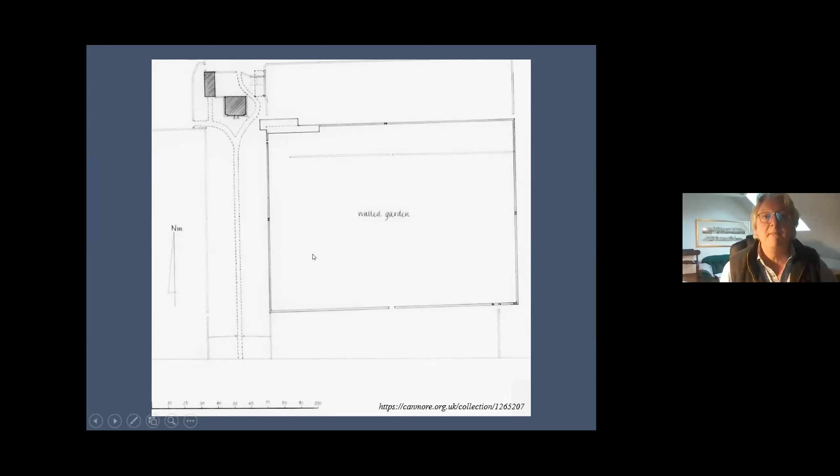This is a close-up, zooming in, showing the extent of the walled garden. It's absolutely huge and very, very well built. It's basically sort of 2.5 to 3 meters high. These walls are coped with great slabs and containing some internal features.

So this seems to be a sort of a terrace of some sort, and you wonder what was being protected within here. Is it trees particularly, as well as the garden areas? And you can see it's slightly down slope, so it's just tucked in behind the ridge. So that's a maximum area of protection. This falls outwith the current project, but it's all part of the associated landscape.

But you can imagine this symmetrical composition with this great frontage to welcome you with the sweeping staircase up to the front entrance.

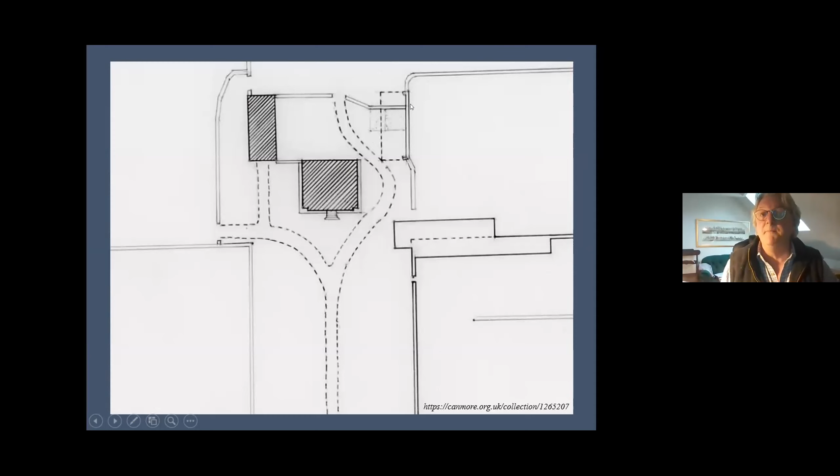And clearly it's not just a farm shed in its original form. It may have been a dairy or ancillary storage or accommodation. So not just a farm building. So my colleague John Saunders has been very busy trying to visualize how this great landscape may have looked in its heyday, or as intended. That was the building we were just looking at.

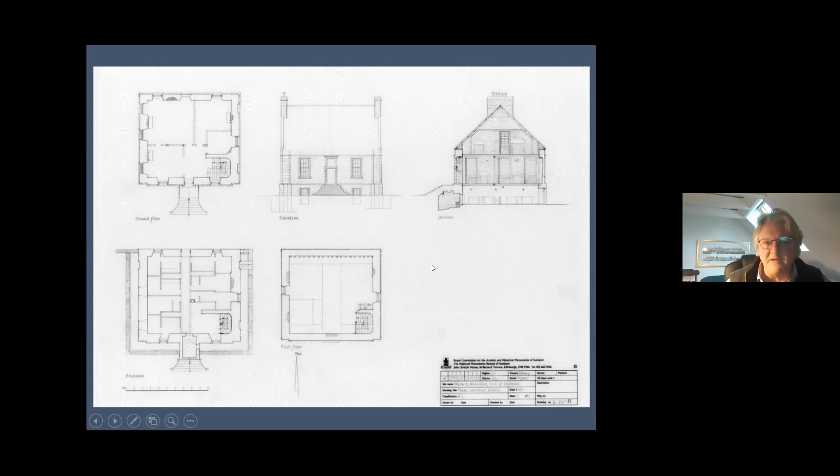And you can also see the front staircase here, in a good state of repair. These are great stone balusters, and we'll come back to those balustrades. So in terms of formal study, the building has been sleeping for a long time, and it wasn't until the late 1990s, as far as I'm aware, that the first formal survey was done. This is by the Royal Commission, a typically beautiful bit of recording work, and they've done a whole suite: the three principal plans, a principal elevation, and a very helpful cross-section through the building. An absolutely wonderful bit of individual recording.

It certainly looks a bit odd. I mean, it's stumpy, and there has long been speculation that it may have lost a more developed frontage, possibly a great pediment sitting on top, rising from these little setbacks here. And I'll get into that a little bit more in a moment or two. But again, you can just see these lovely margins, absolutely designed to catch the light and to make the building appear more stately than its scale would necessarily lead you to imagine.

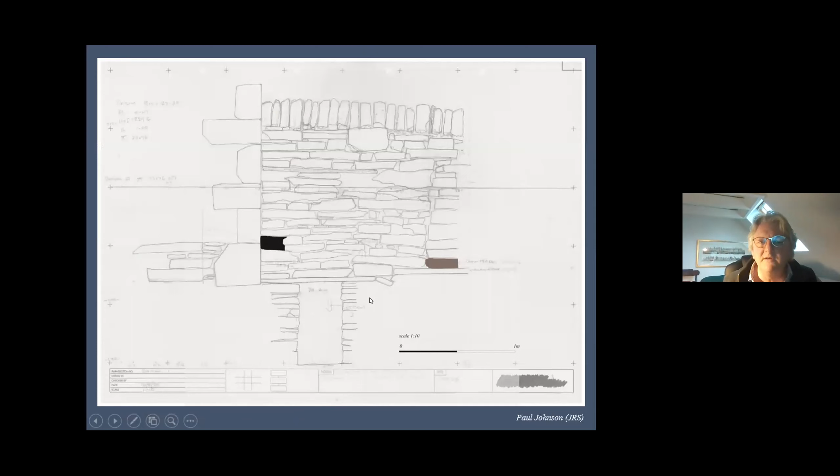And so one of the focuses is how did this moat, this sunken area, work, and where did that particular entrance lead to? And so this has led to some of the initial recording exercises. So a very lovely drawing here by Paul and his team, showing this area here, showing the entrance to the drain, but they then discovered the top of it. So that's just on the other side of that wall.

Quite a lot of interesting finds have been made, ceramics and glass, animal bones and so on, as this work has progressed. And so all of that is being carefully sorted and curated, led by Gail Drinkall, who is the archaeology curator at Orkney Museums. So quite a collection is building up, relating to the domestic life, particularly of the house in its earlier period, both the Honeyman period and the Rae family and later.

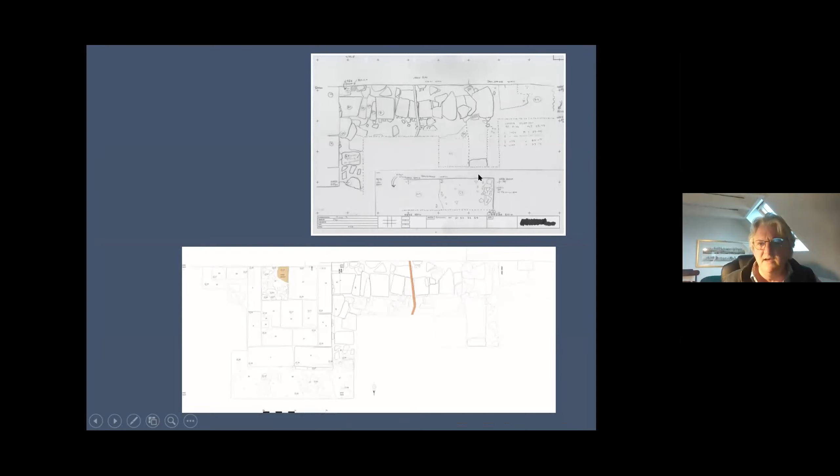And then these are some of the records, the field drawings of that, sorry it's a bit faint, but in the process of being digitized to turn into a full and formal record of the excavation.

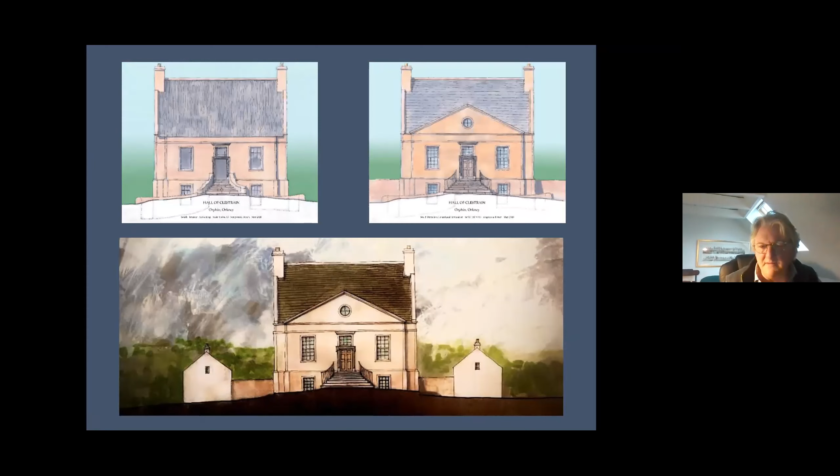And so you have a very smart classical architecture that has been imported at no small expense to the Orkneys, and an extraordinary sight it must have been when first built. And again, I think this is current thinking with the wings.

So there has been a fair bit of historical research. Fiona Gould, who's one of the John Rae Society trustees, has been working with a local group and ploughing through and collating and gathering documents, also working with Orkney archives.

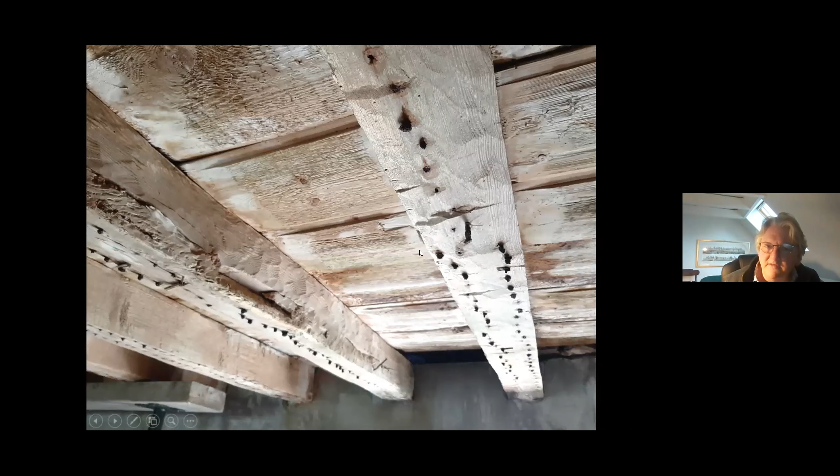So when a lot of this cement comes out, when these are removed, when the floor is taken up, we are very hopeful that there'll be some fantastic evidence for what appears in that inventory, and we can match up the individual areas. What we can see of the ceiling, for example, some details are absolutely wonderful. These are the carpentry details of sawn and adze, the lath nails to the plaster ceiling, evidence for partitions, sockets and joints and so on.

So clearly there's a lot that can be learned about this space. And so even if it's not restored or reinstated, it will be absolutely fascinating to know what the arrangement had been. So I suspect there'll be a lot of evidence to be revealed, but not at this stage.

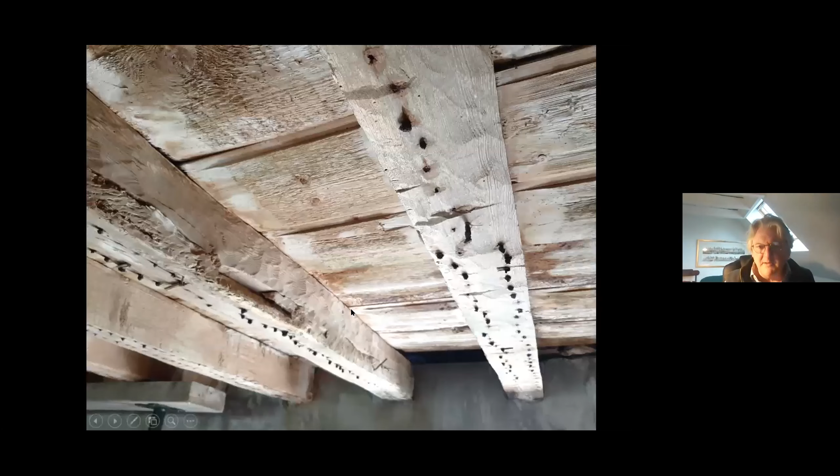In one corner of the basement, you have the stair, very finely built stair that rises up to, well, or descends from the principal level down to the service areas where the kitchens and all the other service arrangements were. This is an extremely fine pen check, basically cantilevered.

Each one supports the next one, and they're sort of socketed into the wall. And so it's a self-supporting stair built on sort of mathematical principles, and it's a very, very fine feature, very sort of Edinburgh New Town, or wonderfully sort of Georgian. That comes up to the principal level.

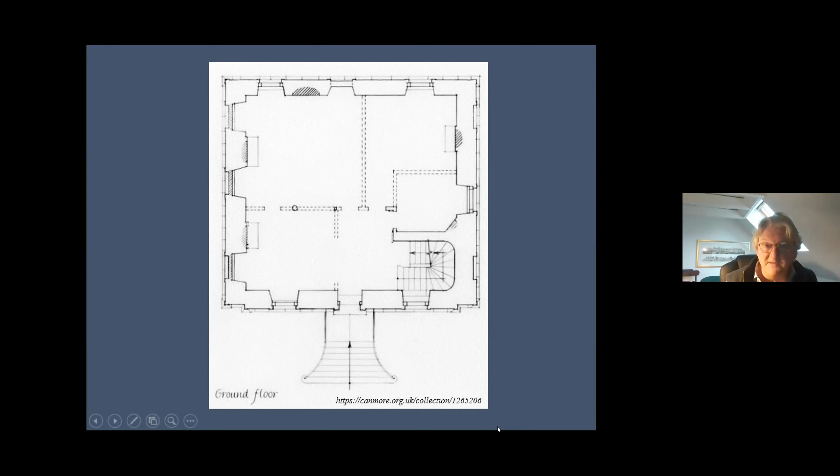And so in terms of the plan, a lot of the evidence was clear, and certainly the inventory allows naming of a lot of these spaces. So here we are. This is the main entrance. You just come in. This is the stair going up to the first, second floor. Absolutely beautiful again, and it's a much taller space, and so the steps are taller, and you can see the sort of state of it.

Most of the walls are green from decades and decades of saturation and salt ingress and the Orkney climate. So in some ways it's amazing the building is still standing, but the building is absolutely saturated. A lot of the timber, particularly where they meet the walls, have rotted, and so there are stability issues.

But again, once you start looking, you can see all sorts of things like internal wall plaster. Here's a lovely fireplace with a beautiful sort of basket arch detail visible, later packed in with cement. There's another fireplace. So these are all lovely features, and you can imagine a sort of timber panelled surround framing the stone.

And as you look through, there are all sorts of strange details. These are lintels, some of the windows may have these marks on. These are cut by a little blade called a race knife. And these are almost certainly merchants' marks from the importation of this timber, which is conifer, and likely comes from

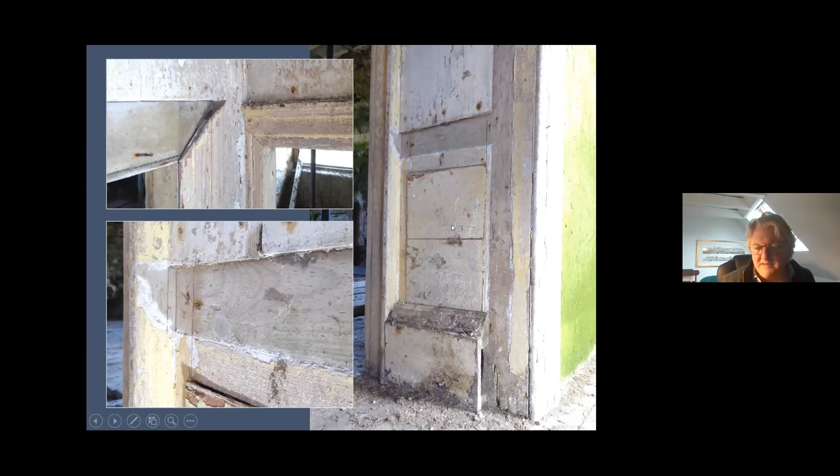Still dado rail detail, and again you can see where it's been pulled off. You've got the profile of the moulding, and so that's enough evidence to actually reinstate that timber. So it's just here. Skirting, one bit of skirting still survives with a moulded top, and beautiful rich mid-18th century detailing, and even the yellow paintwork still survives, and it looks like it has never been overpainted, which is remarkable. I think that's an 18th century paint scheme, confirmed by some evidence elsewhere.

So this is looking up at the soffit board of the window, and again beautiful fielded panels and the very fresh yellow paintwork for that particular room. There are bits and pieces lying around, and we're looking at all sorts of evidence, and every individual timber can be precious.

Here we have one which has a wonderful, very, very crisp profile. This is above, we've relocated it to that position there. So this is actually within a little vestibule. So that's the hall. You came into a vestibule to then go into the next rooms. And this is a cornice, a timber cornice that came from that position there. It's the only surviving one, but it's enough to say, right, okay, you can reinstate that detail in that room very, very reliably.

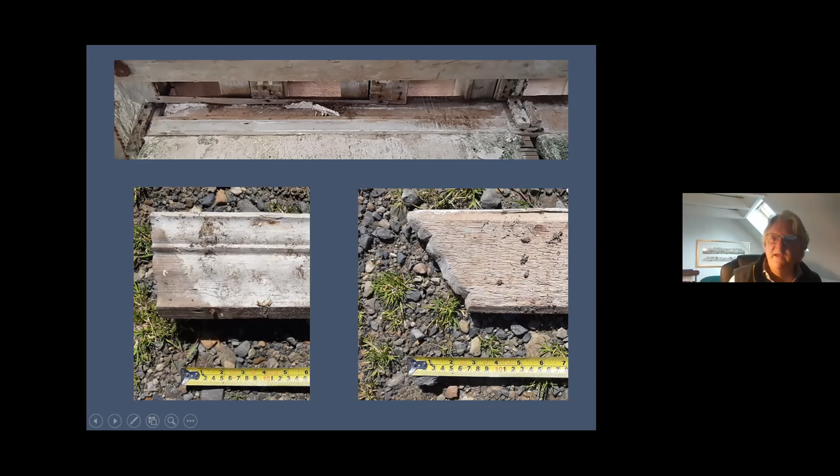Here's a close-up of that, so you can see the profile of the returning part of the cornice. And these incredible Georgian, this has been contoured to fit as the next timber would fit onto here. It just shows the absolute quality of the joinery. It's all imported pine.

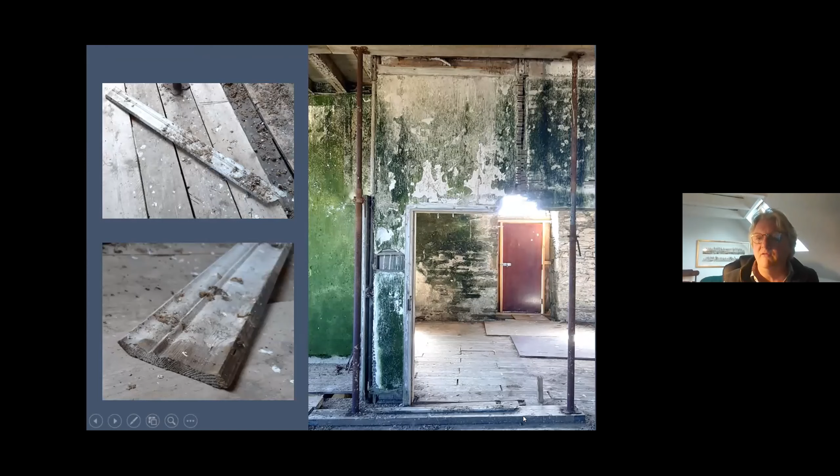Where a lot of these features have been taken out, because the original floors are still in position, you can actually see a great deal of evidence on the floors. And so here you can see sockets, mortises cut in for partitions that have since gone. So this is the vestibule that we were just looking at. So those walls survive. We're looking at the evidence for this wall here in the floor at that point, looking the other direction. And so there's a floor, and you can see here an entrance. These are studs going all the way along, and I think there's another entrance on that side.

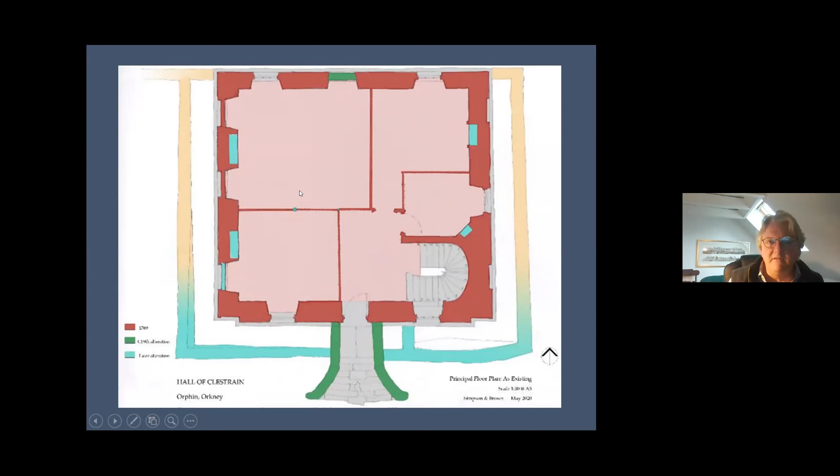This evidence is again subtle, but it's absolutely wonderful, and a lot of pigeon guano had to be cleaned off to find all these things. So this will need to be recorded in great detail, and it will provide a complete plan of the first floor level, confirming. A lot of the evidence has gone in here, but we know additional details, such as there was a closed vestibule with an entrance at that point, and I think there was probably a door in here. But just the survival of what still remains and the evidence for what doesn't is extraordinary. Again, we know that there were entrances here and here.

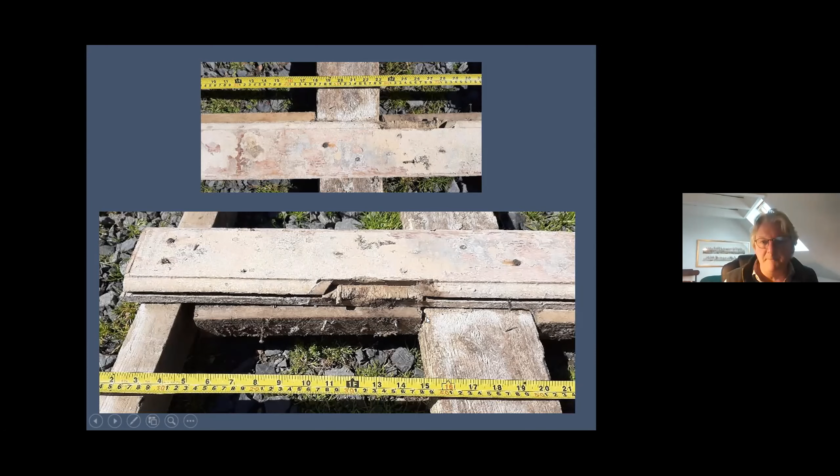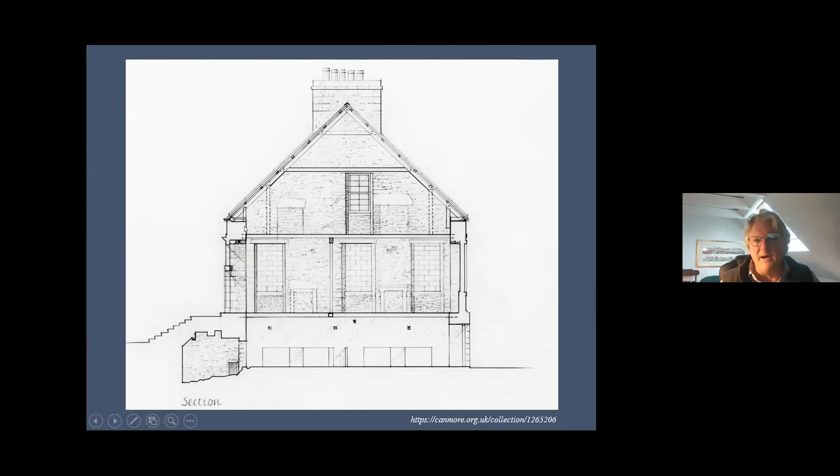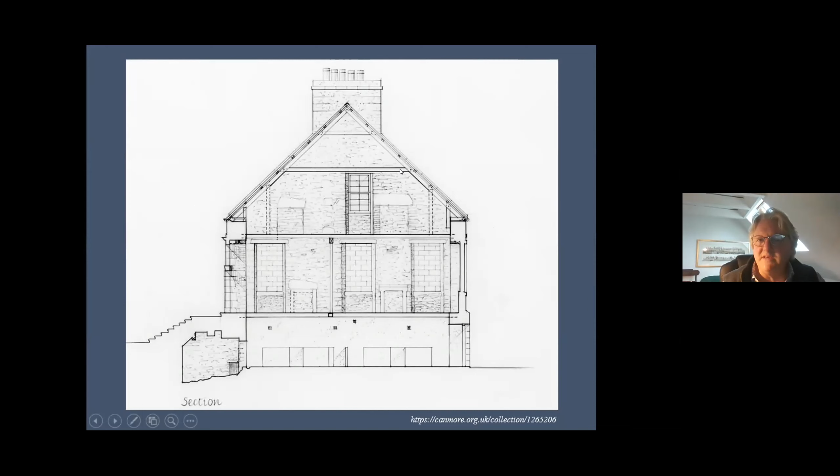So I'm coming back to this cross section. We're just going up to the bedroom level here, and showing you the roof cross section. It's a very broad span, something like 8 or 9 meters. So it's a very, very broad roof, but with single rafters held in place by these collar beams. And it's an absolute spectacle to behold. It's absolutely superb. Superb bit of carpentry construction. It's an incredibly exciting roof structure to see as an archaeologist.

You can see, well, it's a pine roof, and there are all sorts of joinery details. And this particular framing at the wallhead smacks of something earlier than the mid-18th century. It's very much a 17th or even 16th century type of construction. You see these in tower houses and earlier laird's houses very regularly. And so this is a much older type of framing technique that has been employed on a very up-to-date building. So it's an interesting combination of vernacular and the latest building practices.

So this is very much the vernacular tradition. You can just see that these are called sole pieces, and they hold ashlar pieces. So it clamps the top of the wall. The whole thing is held in place with stout pegs. Basically, late medieval type of carpentry that is still very much alive and well in the 18th century. Here we are. You can see the collar beams lapped and pegged at the apex as well.

There are assembly marks. So these are framing marks; each frame was carpentered off-site, brought possibly on boats to the building site itself, and then reassembled. And these assembly marks allow you to put the pieces back together. They were laid out in the wood yard to begin with when being made, and then dismantled like an IKEA kit, and then reassembled on site. They're not in numerical order, which might suggest the roof has had a chequered history, or possibly it didn't matter that they went in numerical order during construction.

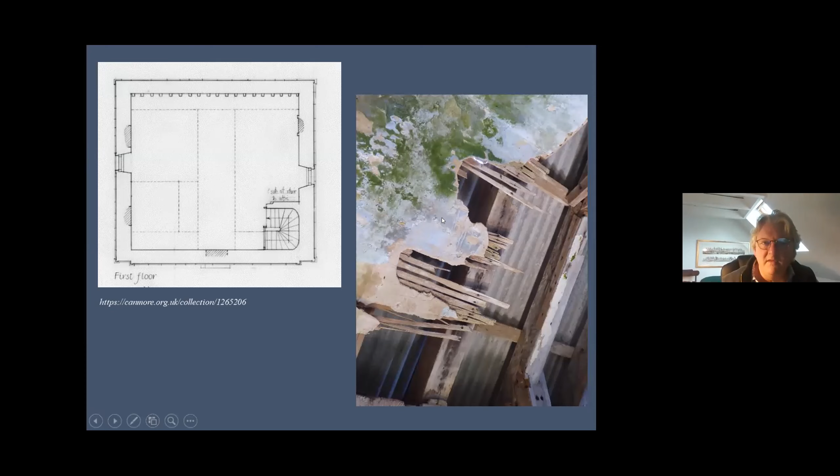And this is the south side where the pediment had been, and the framing is different. At each end, you've got the framing matching the other side, but in the middle bit where the pediment was, the masonry probably rose up here, and so these are of a different detail. So that is quite good evidence for what has gone. And then you can see the framing here for a sort of small roof, a tympanum roof, riding to the back of the pediment, and the window would have been in the middle here.

And there is slight reference in that wonderful inventory to the tympanum in the garret, which must be referring to this. And so again, there are 3 or 4 bits of evidence to support this great pedimented frontage, which we know almost certainly blew down at the end of the 18th century during a gale. So it was only in existence for 20 years and collapsed because of the storm damage.

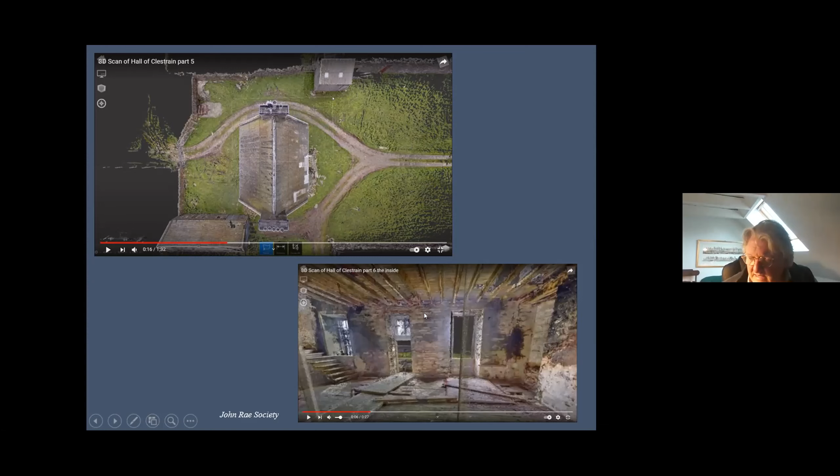So it's very useful on some levels to visualize the site, and there's a record of the state of the site and for control for survey. But as you zoom in, the detail pixelates, and so the next stage would be to do a more detailed survey. And the current way of doing it is through modelled photography. And so you would employ various things.

So this is another site, Craigievar Castle, where a drone was employed to take high resolution digital photography all around the outside of the building. And at Clestrain, it would be inside as well, to generate a model, which is an incredibly accurate way of doing it.

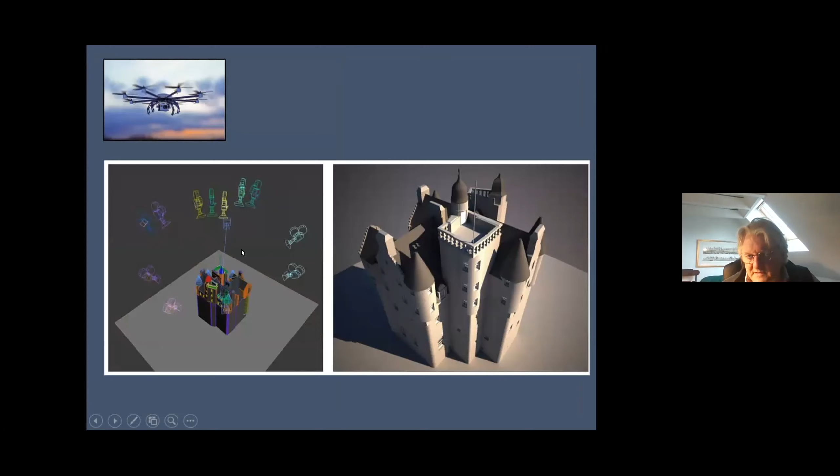And here's another, this is a building we were working on near Inverness called Fairburn Tower. So these images are obviously photographic images, but they're modelled photography. So it's 3-dimensional photography built up from multiple images that are sort of cross-lapped and merged together in a computer.

And then you can print out very, very high resolution, accurate 2-dimensional elevation drawings, elevation images like this, which you then simply trace. And so because the detail is so good, you can do every stone if you wanted to. And on top of that, this is an archaeological drawing where we're layering on the different phases. You can see where windows have been expanded and later patching and so on.

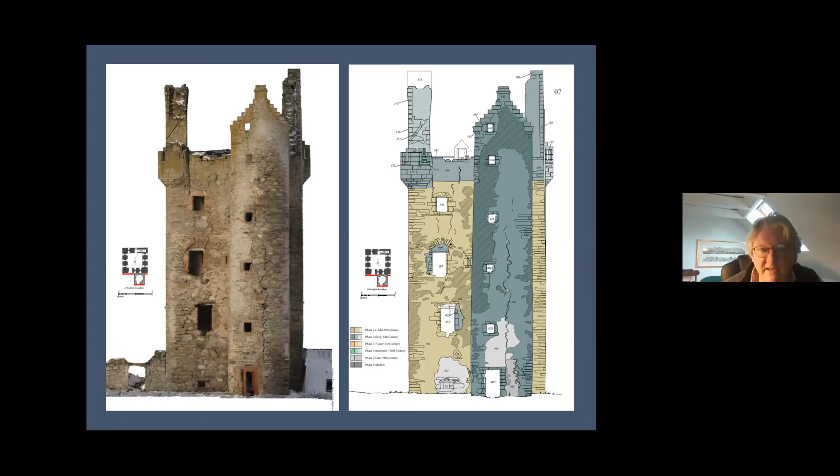It's exactly the sort of record we'd love to see at Clestrain. Again, so rich is the detail, it well deserves it. And as you get inside, the detail becomes more complex. This is obviously a masonry building; Clestrain will have a huge amount of joinery detail as well. And so there's quite an elaborate process that needs to go forward.

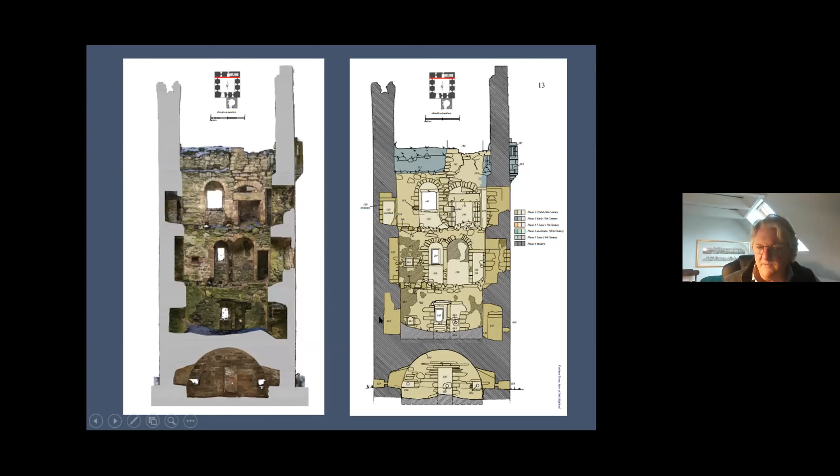There's also the careful identification of all of the loose bits of building materials, particularly timber. There's paint analysis which could be done on that, and a huge jigsaw puzzle trying to work out where all these bits and pieces came from originally, and a massive wealth of evidence.

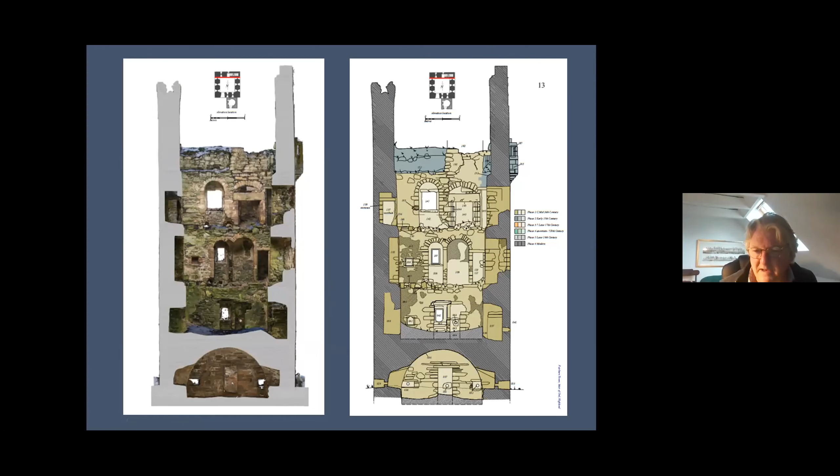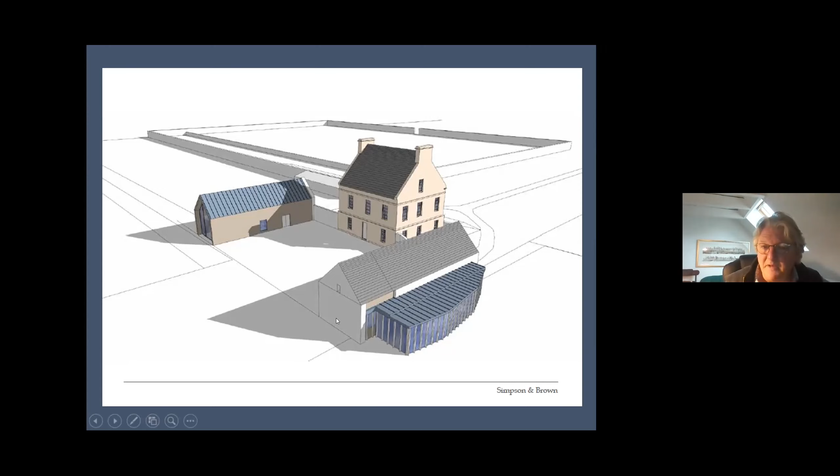This will all feed into the conservation approach to the building and the reuse, which isn't necessary in all respects. It doesn't need to be entirely devoted to following the evidence. But again, as part of the conservation planning process, it's important to know about the evidence and to know what can be learned of the building before making decisions about what to do with it.

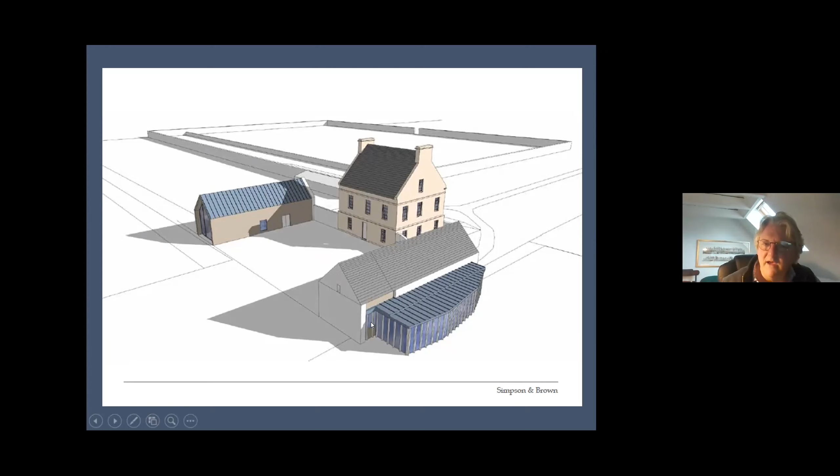Again, this is a part of the feasibility study, and it's an in-progress part of the design process of working out what could possibly be done with this incredibly sensitive site. Here, for example, is a modern structure on the site of the east wing, but precisely mirroring its form. So very much recreating the scale and the setting for the north frontage of the building. It doesn't exclude putting on contemporary additions. So it's very much a balance of evidence and modern requirements and good design.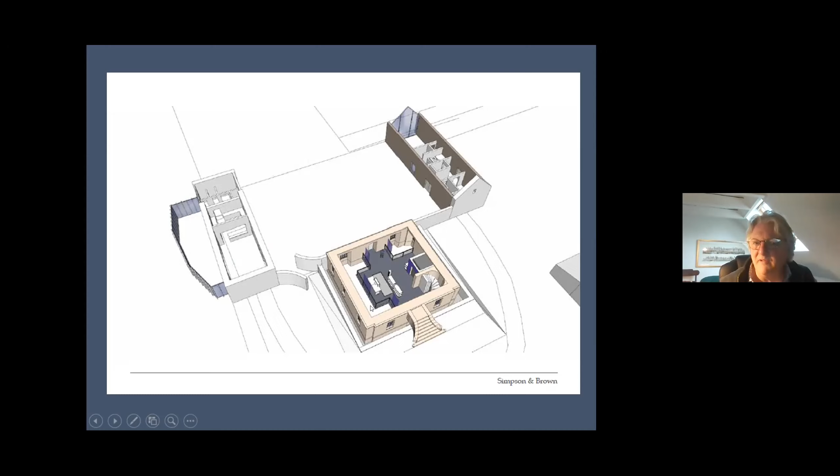So here are 3 shots of the different levels showing the building. Most of the features of the basement level have gone, and there's no particular reason to reinstate a historically authentic interior. Very certainly there's more that should be done on the principal level, where the evidence is much clearer and a lot of it still survives.

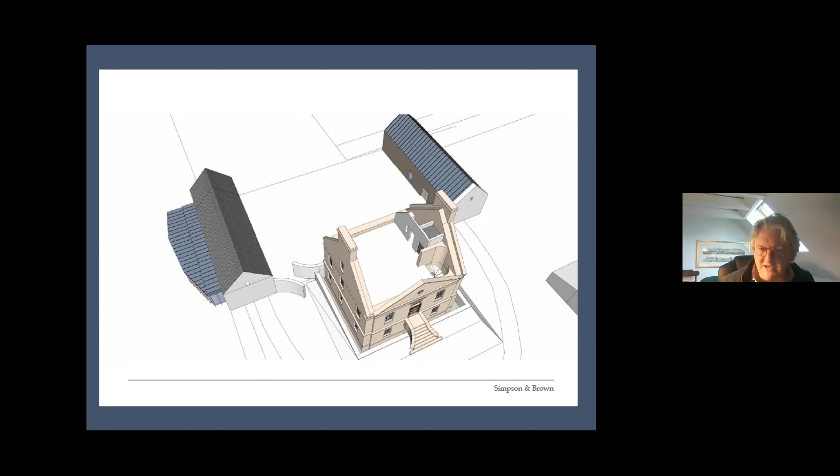And again, up in the loft space, maybe there's some reinstatement, but maybe there's a more contemporary way of using that space. So really, it's a balance, and you feed all of this information in, and hopefully come out with a stunning new building, taking all the best of the old building.

And just to really finish up on, again, the Society has a wonderful presence on the web through their website and all the various links. And again, I'm sure you'll have seen it, but absolutely explore. There are so many aspects to this. I've barely even touched upon John Rae himself.

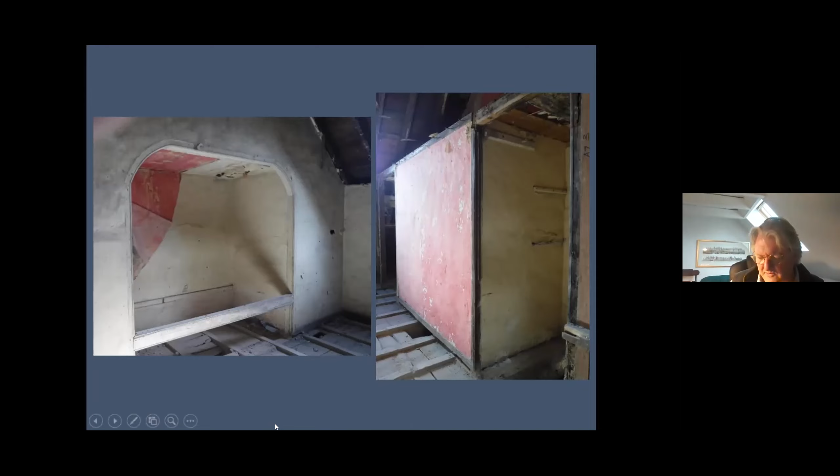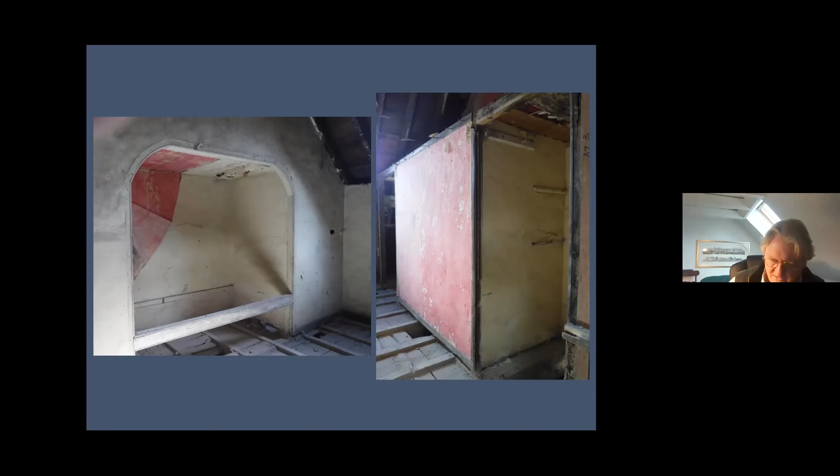For that house in Eyemouth, Guns Green, it's very clear that John Adam designed the building and oversaw the exterior shell of it, but the interior was fitted out by the Nisbet family. And if you ever go there, it's well worth seeing, not only because it's an interesting comparison for Clestrain, but also they were a family of pirates and smugglers. And so the Adam building team built the shell and started fitting it out, and then were sent away. And the local people then came back in and started unpicking it in order to build secret compartments everywhere. So that's a case where two separate building teams worked on the same building. There are very extraordinary things for concealing tea built into the floor structures.

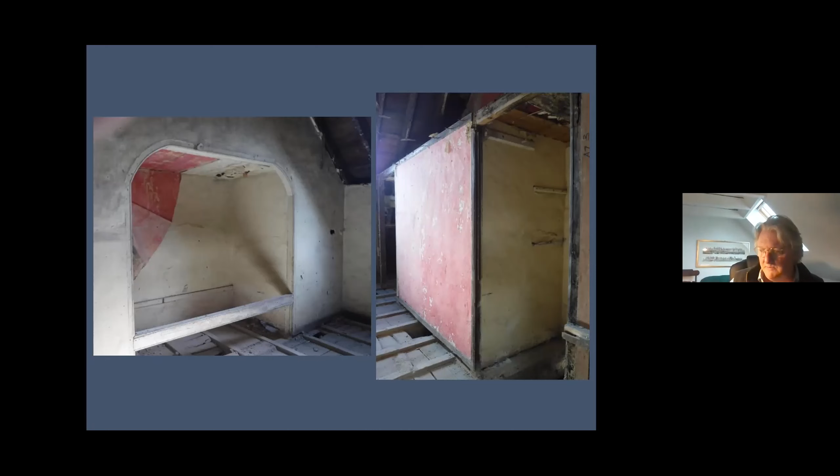But again, I'm sure it's partly vernacular, that roof structure, and certainly must draw upon the local traditions that were still very much alive up in the north. You wouldn't build a roof like that in Edinburgh, for example, in the mid-18th century.

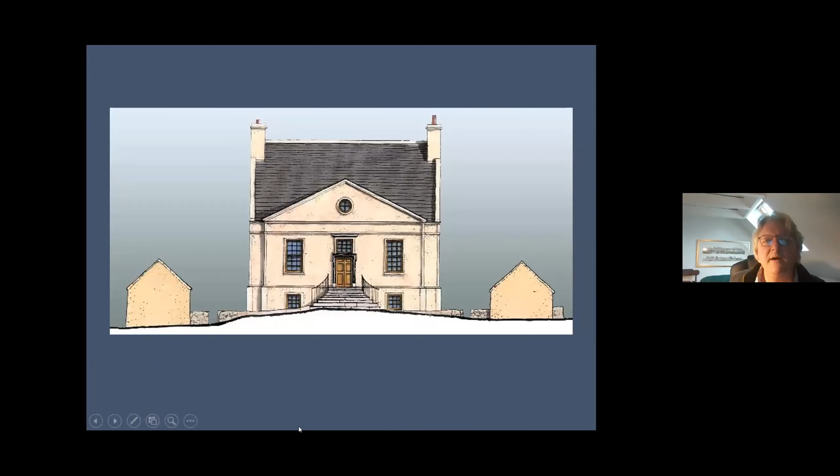Why did the pediment fall down? I think it was a gale in the early 1790s. I think a documentary reference, and Fiona can correct me on this, suggested that the roof came down, but clearly the roof didn't come down. It's still mostly intact. It probably was a huge blast of the gale hitting that upstanding bit of masonry, the pediment, full on, destabilizing it, and it collapsed. Certainly there are no records that show it in place later on. Yes, I think there'll be a structural engineer involved to ensure that a reinstated pediment wouldn't fall down.

Let's have a look. What were the iron bits on the front of the house? Looks like some of them were gutter brackets, yes. I don't remember what the longer one is, but certainly the iron gutters are, I think, later features. Certainly the ones that are there are later cast iron gutters. I'm not sure what the original detail would have been. And that's a detail that's really important, obviously, for the conservation of the building, if you're reinstating something that appears and functions, at least on the exterior, like an 18th century house.

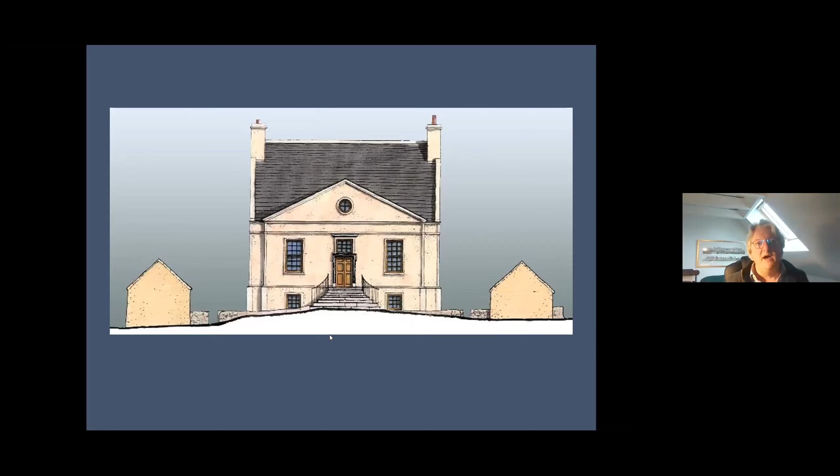Oh yes, Charlie. With the other pediment precedents, were there valley constructions behind the pediment, or does it act as a parapet? I think because you have the evidence for the window, which is in the roof structure, there's a bridle beam and enough room to actually physically go in behind the pediment. I think the idea that there was a circular window, or at least a window, I'm sure is correct, which would mean that there wasn't a parapet.

There must have been a little tympanum roof running to the back of the pediment. And so, yes, there would have been valleys on either side going down to the angles of the building. And I think that probably is confirmed by the phrase in the inventory, the tympanum in the garret. I'm sure it refers to that little space.